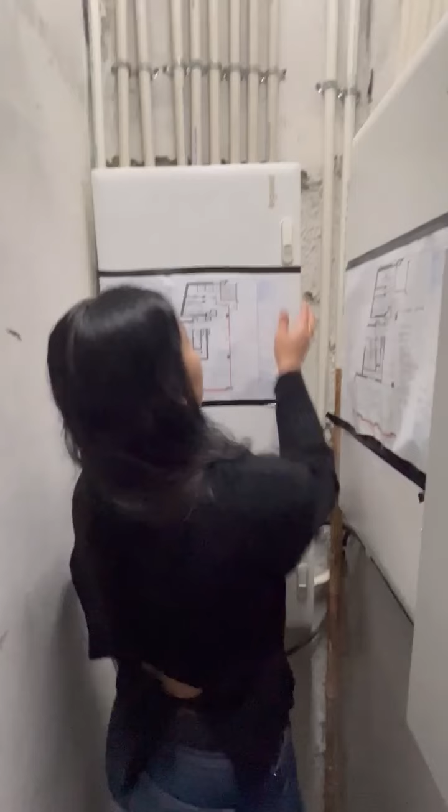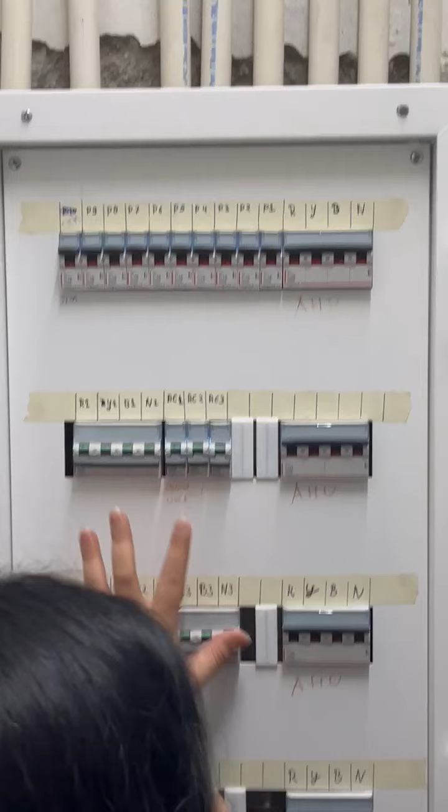So we do the numbering in our DBs like this. We have P1, P2, P3. We go till P10. P10 is the DTM, the digital temperature meter MCB, and the rest are our 3-phase MCBs and our AHU powers and our AC powers MCB. AHU1, AHU2, AHU3, this is the main MCB which is giving power to our AHUs.

AHU starting from the start. AHU1 is in the exposed area. AHU2 here in the ceiling area. This is the main power which will give power to this DB.

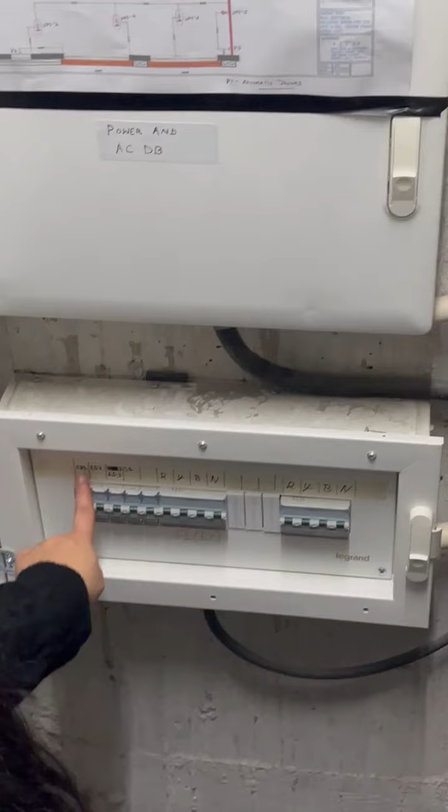If there is a lot of smoke, that exhaust will work to take it out. So ED1, ED2, ED3, this is your damper 1, damper 2, damper 3, exhaust damper, hence ED. And fire exhaust is this FE exhaust. This will give power to your fire exhaust. This will give power to this DB. This will switch on and off this particular DB.

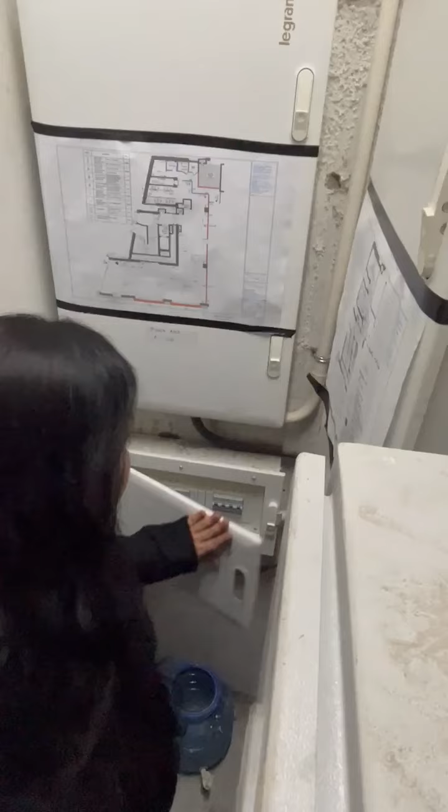So this is my power and AC DB. This is my fire damper and exhaust DB. Now this DB is my lights DB. This also has my UPS points because we have our emergency lights.

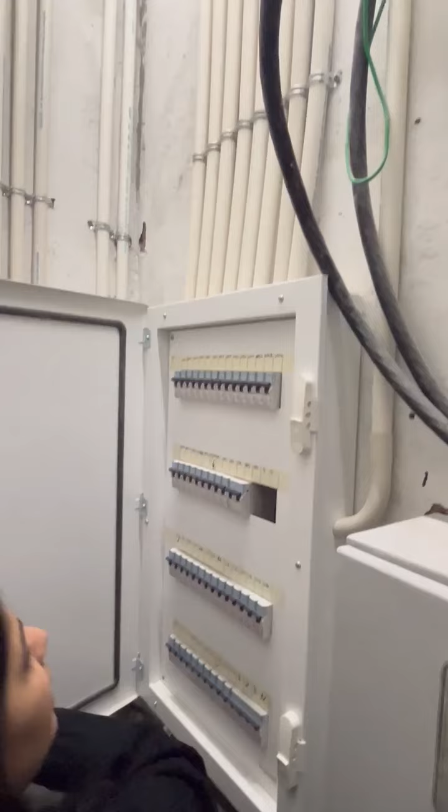So L1 till L24, these are all my light points, normal light points. This is the main of this DB which will give power to this DB. UPS points, UPS 1 till UPS 20, these are my UPS points. UPS sockets, emergency lights, everything. So according to these numbers, we have marked our numbers on our drawing as well.